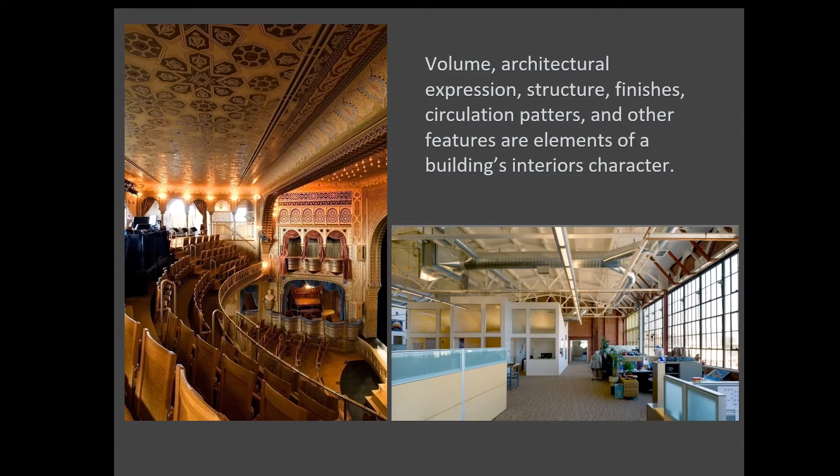Further information about identifying historic character is available in Preservation Brief 17, Architectural Character: Identifying the Visual Aspects of Historic Buildings as an Aid to Preserving Their Character, and Preservation Brief 18, Rehabilitating Interiors in Historic Buildings: Identifying and Preserving Character-Defining Elements. These publications are available on the TPS website and can also be ordered through the Government Printing Office.

The guidance in my presentation is largely taken from Preservation Brief 41, where you can find additional information on how to approach a seismic rehabilitation strategy that is in accordance with the Secretary of the Interior's Standards for Rehabilitation. To put it in a single sentence, the goal of a successful seismic rehabilitation is to reduce the seismic vulnerabilities of a building while retaining historic materials and features to the greatest extent possible, and avoiding or minimizing alterations to significant historic features and spaces.

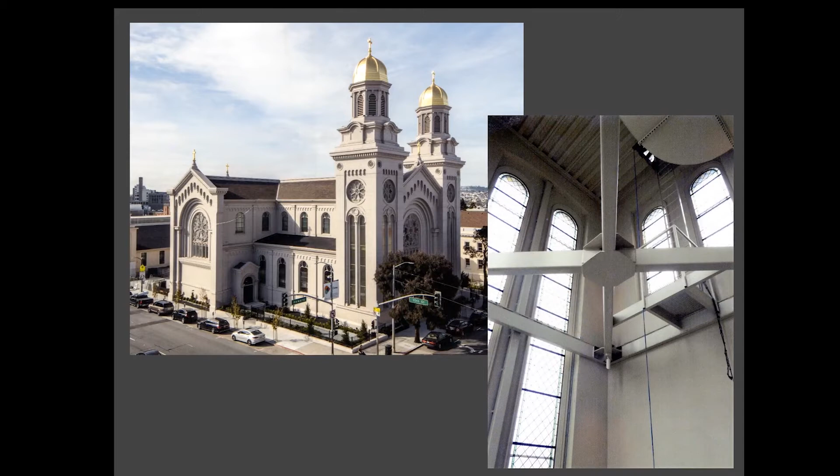The other major intervention required additional steel reinforcement within the towers. The towers, while important architectural elements of the building, are not considered primary interior spaces, and they provide a good location for additional structural reinforcement. The strategic location of these seismic interventions avoided any significant alteration to the building's character-defining interior and exterior features.

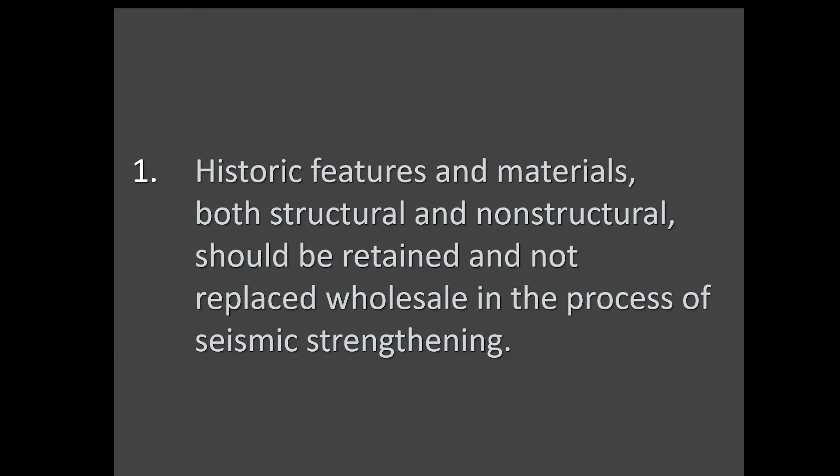Hollow clay tile is a particularly difficult building material to deal with in many historic rehabilitations, not just because of seismic concerns. Very often, complete removal of all interior hollow clay tile walls is proposed. However, in some buildings, important character-defining features and finishes are lost if the hollow clay tile is removed. When important historic features are present, the recommended approach is to reinforce the wall to preserve the historic features and finishes. When necessary, removing historic finishes on the less visible side of a wall in order to reinforce the wall and preserve the significant historic features and finishes on the more visible side is recommended.

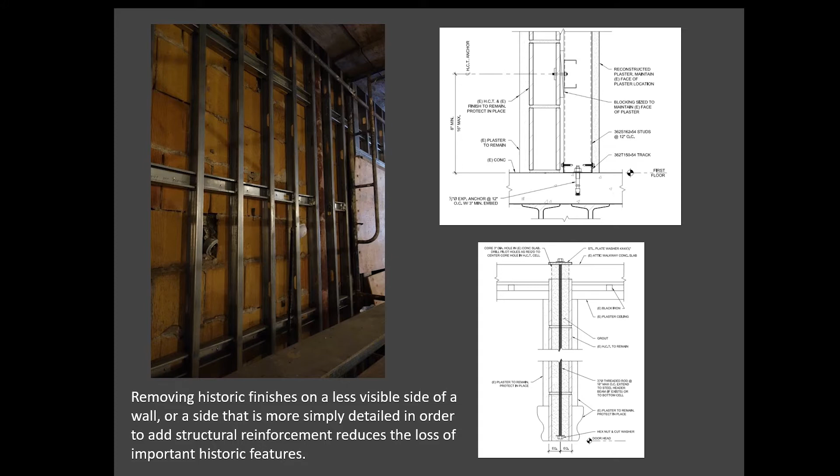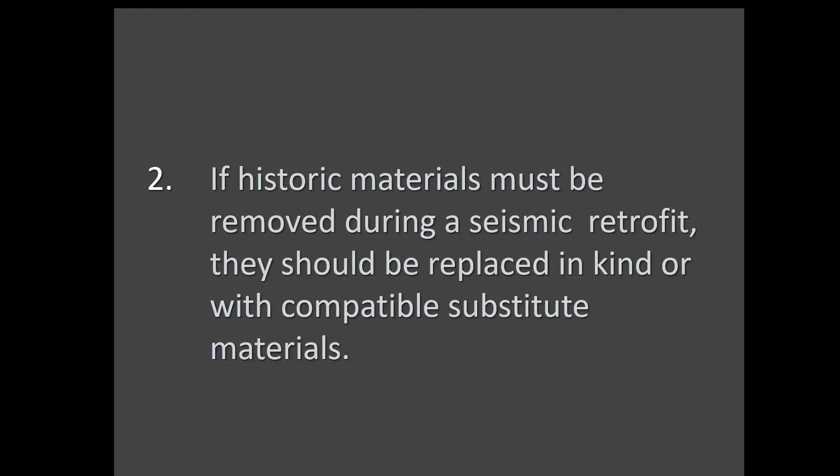The second consideration to keep in mind is that if historic materials must be removed during a seismic retrofit, they should be replaced in kind or with compatible substitute materials. In some cases, removal of historic finishes may be necessary in order to install the new structural reinforcement and avoid altering the historic character of an important interior space. In the King Street Station in Seattle, interior plaster finishes were removed in order to install steel reinforcement in the walls. Molds of the historic decorative plaster elements were made in order to reproduce and replace them after the structural work was completed.

At the end of the project, most of the historic plaster finishes along the exterior walls were removed and replaced in kind. This allowed for the new structural steel to be completely hidden and avoided altering the visual character of this important interior space.

The third important consideration to keep in mind is that new seismic retrofit systems should work in concert with the inherent strength of the historic structural system, and whether hidden or exposed, their installation should respect the historic character and integrity of the building.

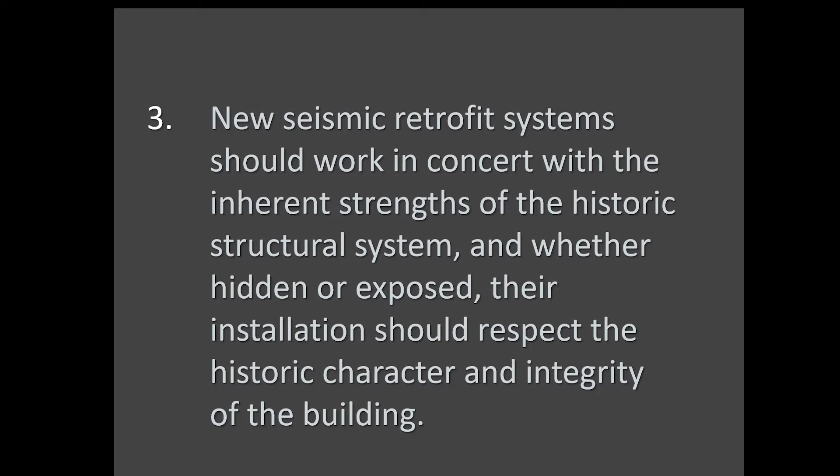In some historic buildings, hiding the new structure may not be necessary. When the new structure does not impact significant spaces or finishes, the new structure may remain exposed as long as it does not directly impact historic architectural features such as windows or doors. Locating the new structural elements some distance away from the exterior wall greatly reduces the visual impact of the new structural reinforcement.

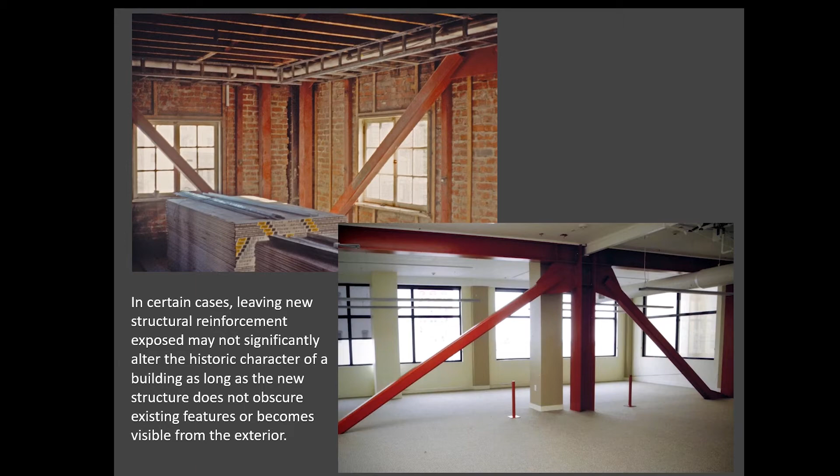The building featured here is the Hibernia Bank in San Francisco, built in 1892. It is listed on the National Register at the national level of significance and was designated as a San Francisco Historic Landmark. It is one of the finest examples of its kind in San Francisco and one of the few structures to survive the 1906 earthquake.

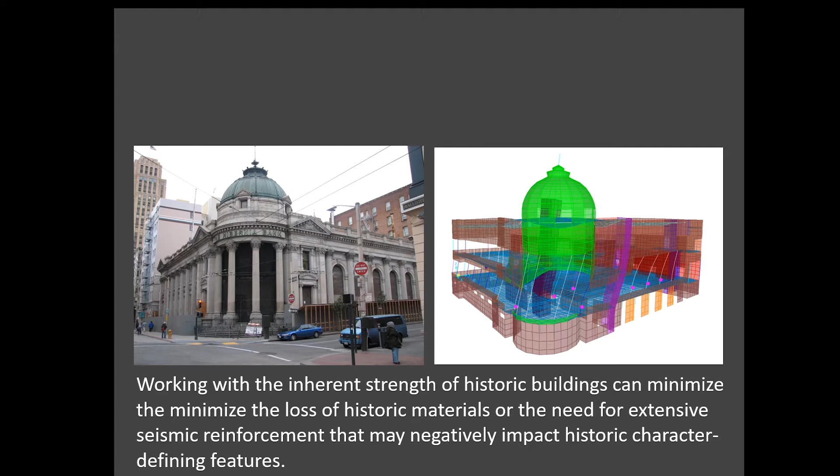The building's large, open spaces on the ground floor are lavishly decorated and are important in defining the building's historic and architectural significance. Preserving the historic visual character of these important character-defining spaces and finishes was of utmost importance in planning the seismic reinforcement on this project, which was certified under the federal tax incentives program.

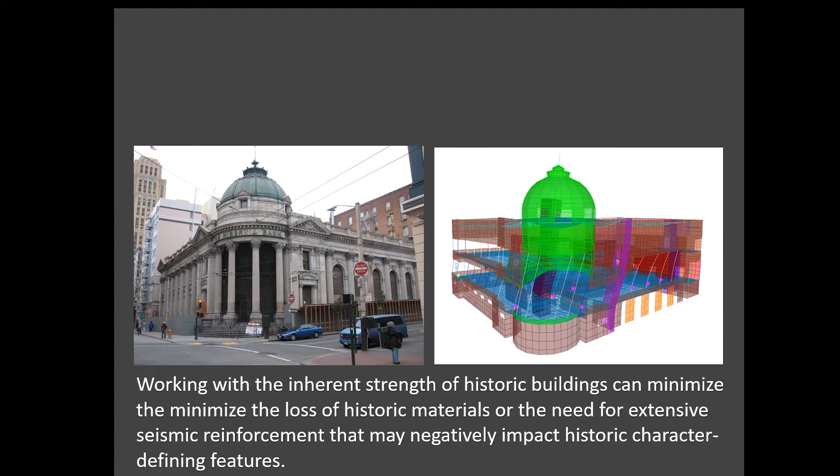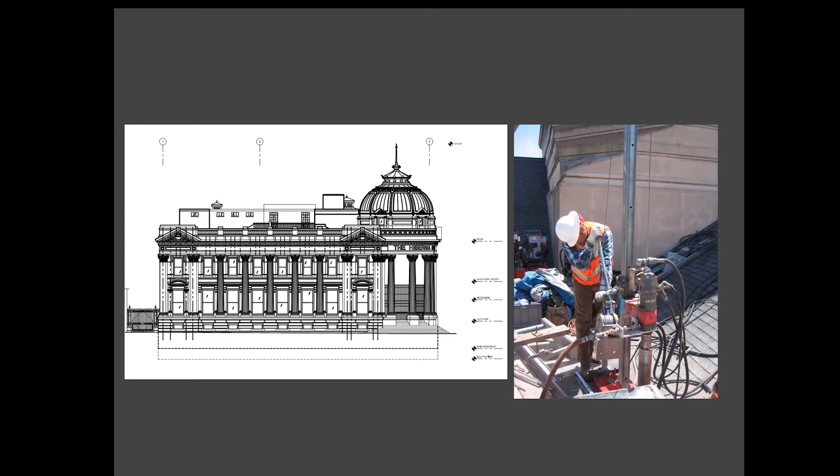The methods used to reinforce the exterior facade of the building involved core drilling to add steel reinforcement in some of the columns. Bond beams were added to reinforce the roof. The two large openings on the roof were identified as problematic and needed to be addressed.

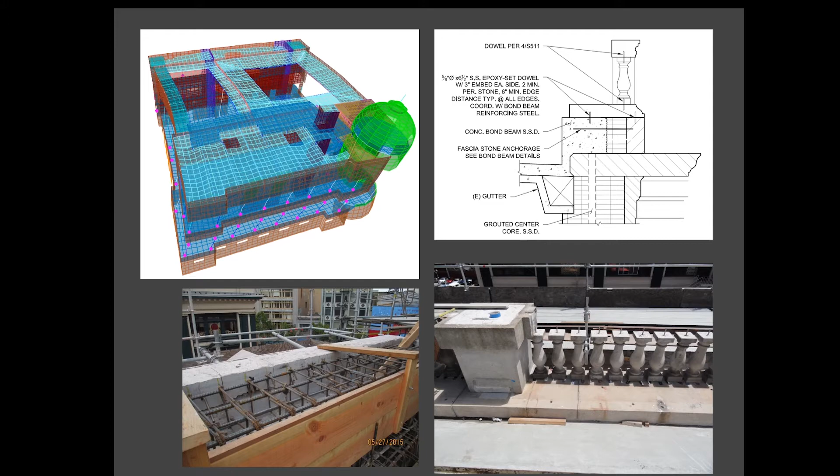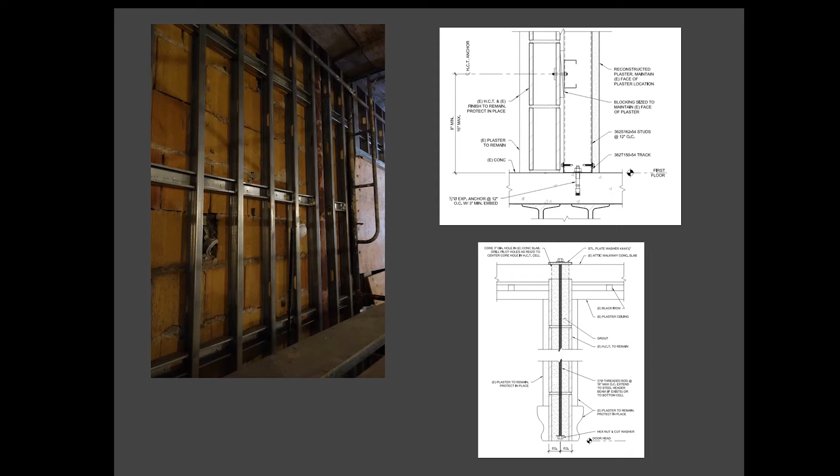The location and placement of the bond beams was carefully designed in order to avoid significant alterations to the building's appearance. After the beams were placed, historic finishes and decorative elements such as the balustrade were reinstalled. To reinforce the hollow clay tile walls and other masonry walls on the interior, metal stud walls were introduced. When thickening the walls was not possible, fiberglass reinforcement was added.

In the end, the careful planning of the seismic rehabilitation allowed the new reinforcement to be virtually invisible. As a result, the building's exterior remained unaltered, as well as the banking hall and other character-defining interior spaces.

To conclude, I would like to stress the importance of doing a thorough evaluation and investigation of a building before planning a seismic rehabilitation. The value of putting together an experienced team cannot be underestimated. Every building is unique and requires an approach that is tailored to its physical attributes and historic character.

I would also like to encourage early consultation with the State Historic Preservation Office staff. They are a great resource and can provide valuable guidance when planning a seismic retrofit program. And finally, when applying for tax credits, an applicant may request that the State Historic Preservation Office ask the National Park Service staff for a preliminary consultation to evaluate the viability of a particular seismic strategy.

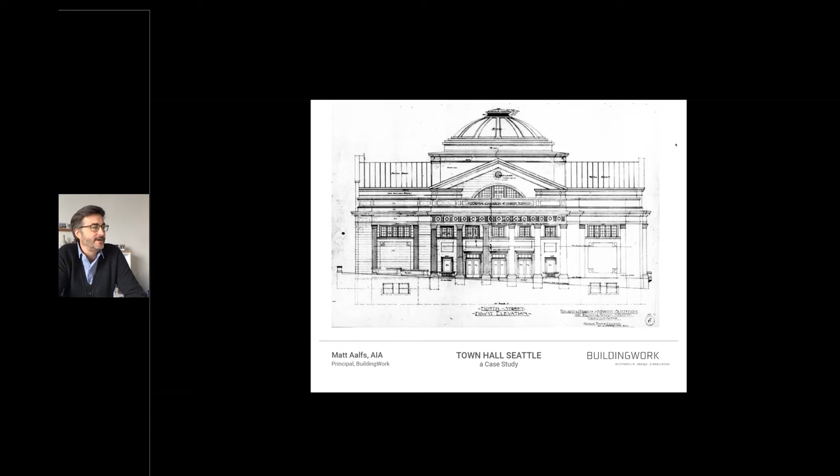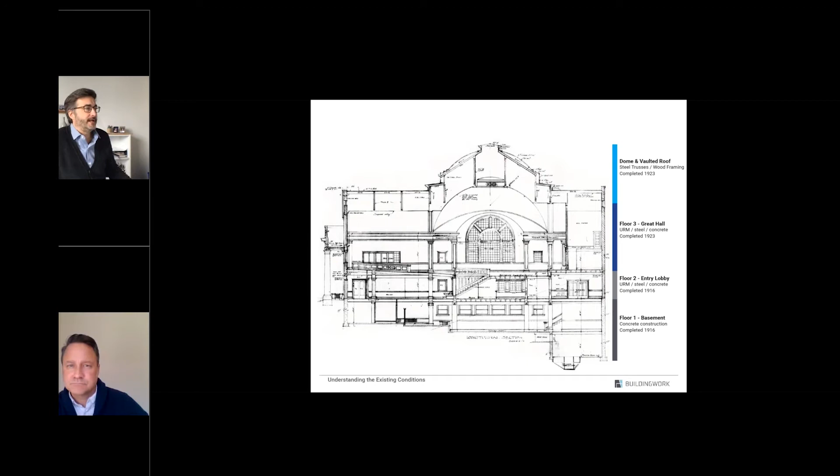Further complicating it is a long span roof system. The building has a vaulted roof, a cruciform vaulted roof that intersects a large center. So a really significant assembly space, significant life safety risk in a seismic event. And the building had suffered very significant damage from previous earthquakes, the 1949 earthquake and the Nisqually earthquake in 2001.

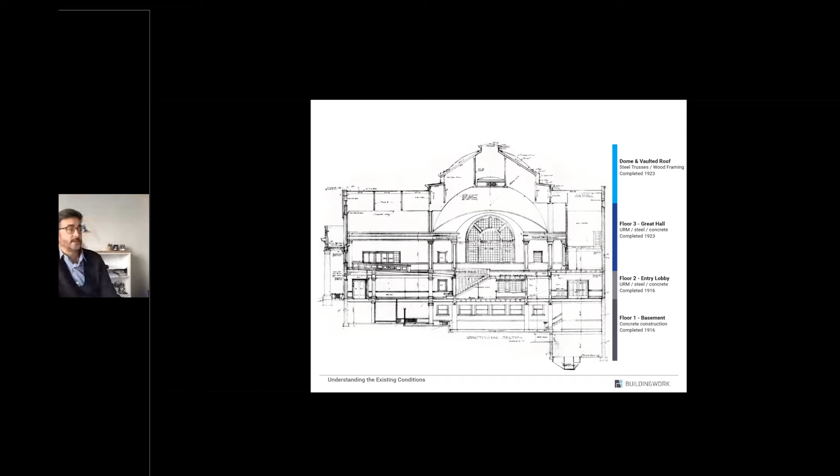Our design challenge was to convert this church, which was in its really original condition for the most part, into a state-of-the-art performing arts center. And by that, we mean patron services such as restrooms, accessibility, elevators, entirely new HVAC systems, entirely new acoustic systems, lighting systems, in a building that was never designed to have them.

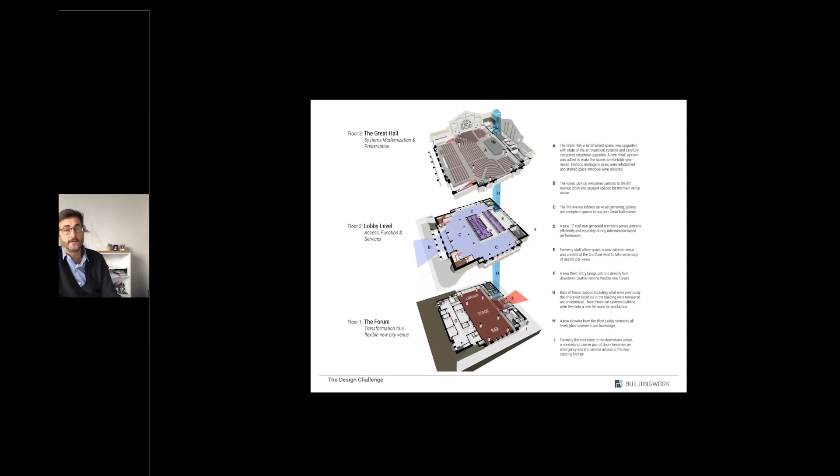And then, of course, the biggest aspect of this was the seismic retrofit, because when you're doing this much renovation on a building, you are required to bring it up to code in general. So the seismic retrofit became an early focus of the design. This diagram just shows the different program elements of the building after it's completed.

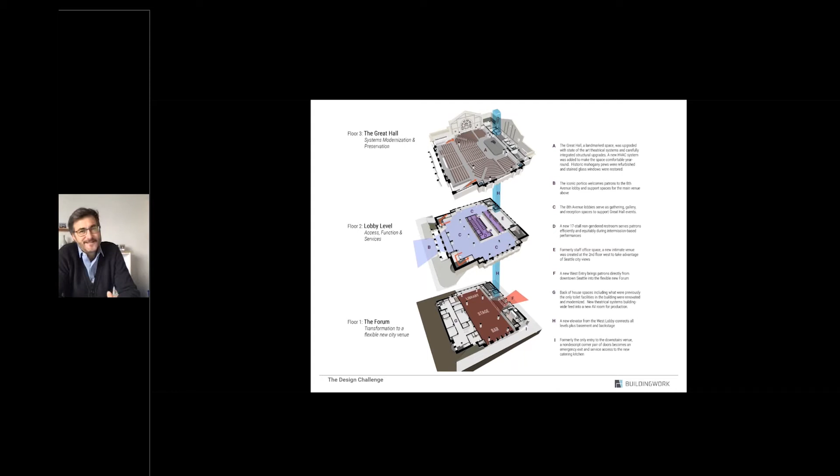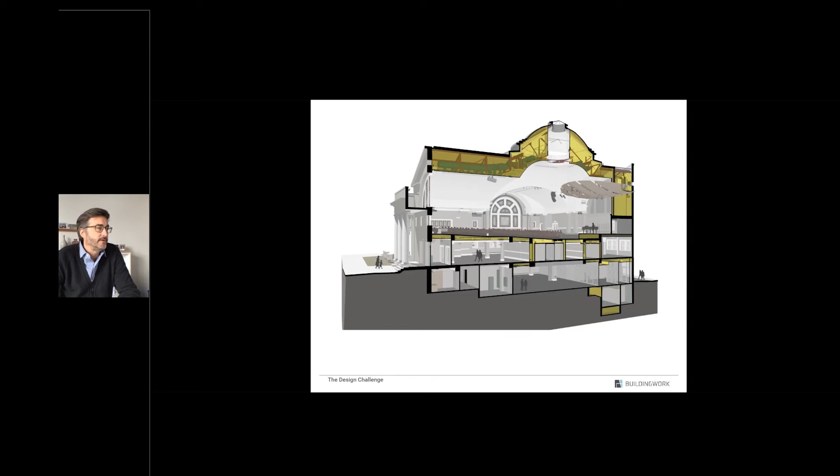The next drawing shows the design challenge is that we had very little space to put new elements, new structural elements or anything else. In addition to the exterior of the building having very significant historic value, the interior, the Great Hall and the lobby spaces on the main level, are all of high historic significance, and all of which needed a very sensitive approach to renovation or to the seismic retrofit. Again, working with very limited spaces for new plumbing, for piping, for new steel systems, et cetera.

So approaching the seismic retrofit design, we have a great structural engineer, Magnusson Klemencic Associates, which is a national firm based here in Seattle. And the starting point for many seismic retrofits that you might see is introducing new braced frames or shear walls. The buildings built in this era do not have structural elements that are specifically designed to resist sideways motion or lateral forces. So we have to put those into the building. As Antoni mentioned, it's a significant challenge.

This would be the sort of off-the-shelf approach on this image right here. Steel braced frames inserted in the center of the major walls, which have vulnerability, in this case, because of very large windows. We have double height walls with very large stained glass windows. Obviously, this was not an approach that we wanted to pursue, and it was not an approach that met the goals of working on a historic building like this. But I mention this because this is where you start when you're talking about engineering a building. And you would see this approach very often used in warehouse buildings or other URM buildings, the big braced frame in the center of the wall.

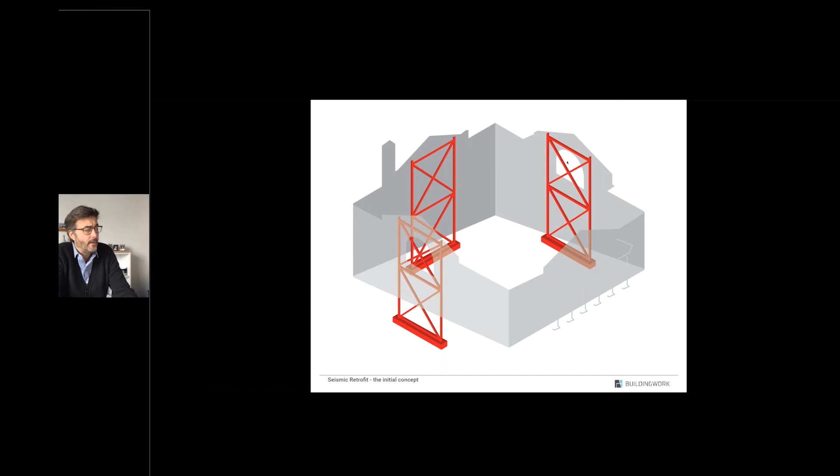We went back and we looked at the building, and what we realized is that the building has stairwells in each of the four corners, which is great for exiting. But the finish in these stairwells was not nearly as highly finished or decorated as the finish in the main spaces. These two stairwells back here are really back of house spaces. And these two stairwells were significant, but the wall surfaces were pretty straightforward.

So our structural engineer and I came up with an approach of putting in new concrete shear walls in the corners of the building and then tying them together with steel plates. In this case, we used epoxy to secure the steel plates to the concrete slabs and connect them to new concrete shear walls in the corners of the building.

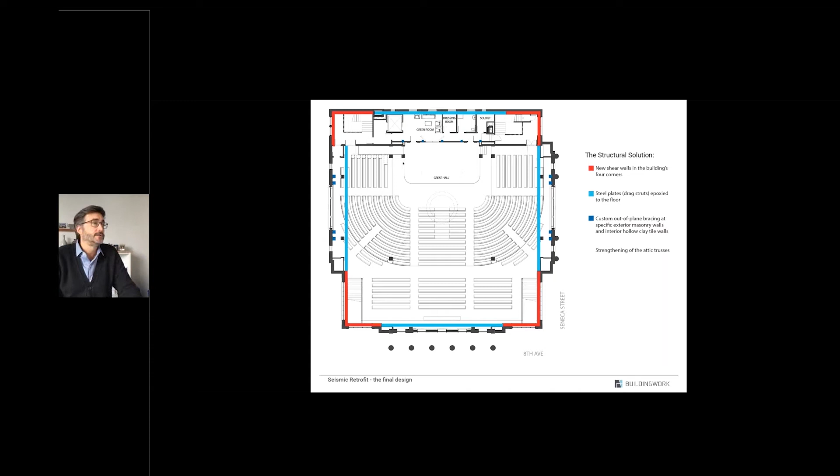There was also a need then to address these URM walls, the ones that have the big stained glass windows, and their out-of-plane movement. So once we addressed the stabilization, the building was no longer going to move side to side, but the big walls could still fall out. So that's where we had to put new structural steel that would be visible.

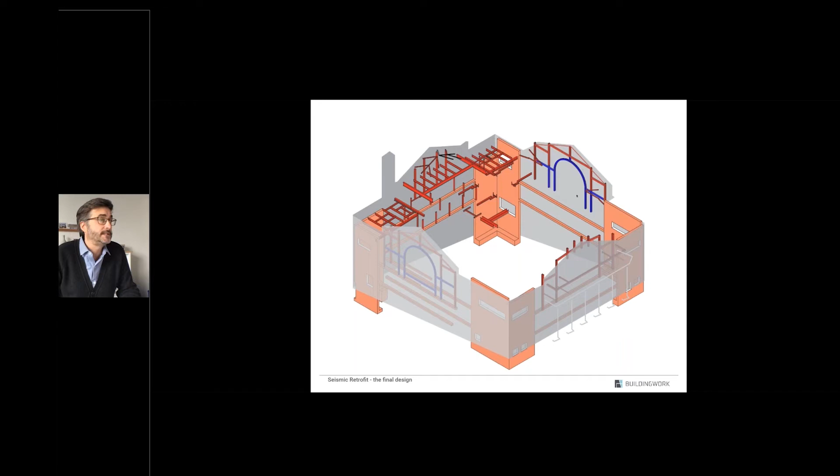Here's a diagram of the final structural design. You're seeing in this light orange color the concrete shear walls in the corners of the building. These are 3-story high, 10 to 11-inch thick concrete shear walls. In red is all new structural steel, which is concealed behind finishes or above ceilings. And then in blue are the only elements that are visible, which are the out-of-plane steel on these large, vulnerable walls.

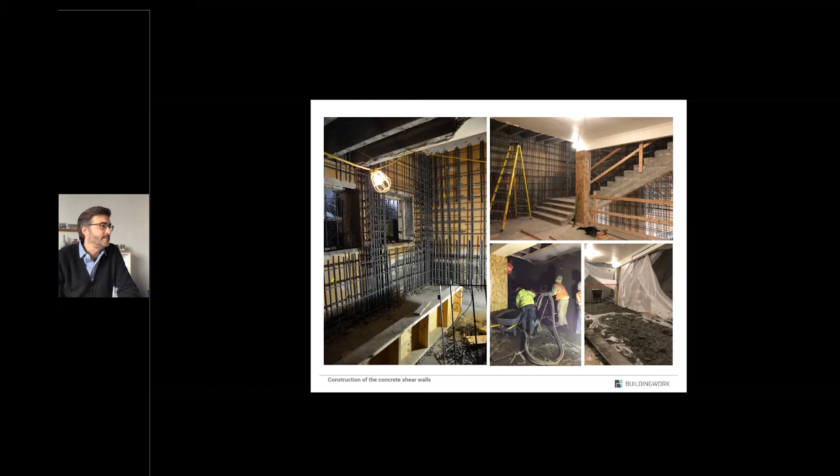Here's some photos of the construction of these concrete shear walls. It's really difficult to do inside a building, but our general contractor, Raffin Construction, did a great job helping to figure out how to build this and to get it done. But it was really, really challenging. A tremendous amount of rebar had to be put inside, and then hand pouring the concrete into that space for these four 3-story tall shear walls in the corners.

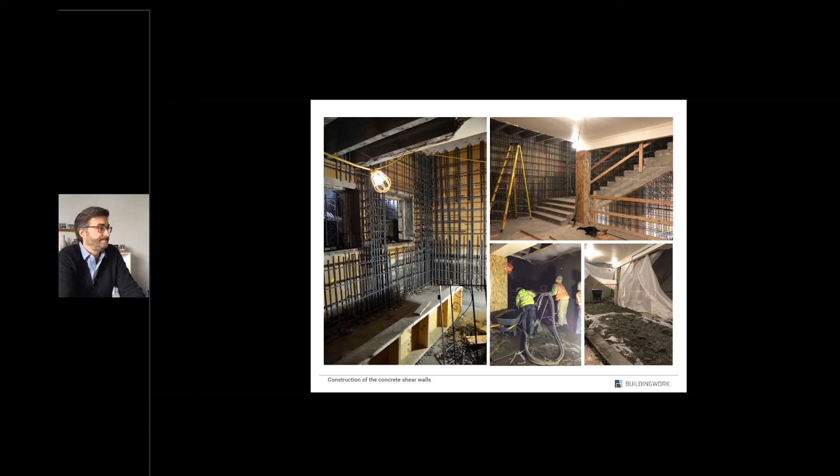I'm about out of time, so I'm going to wrap it up here.

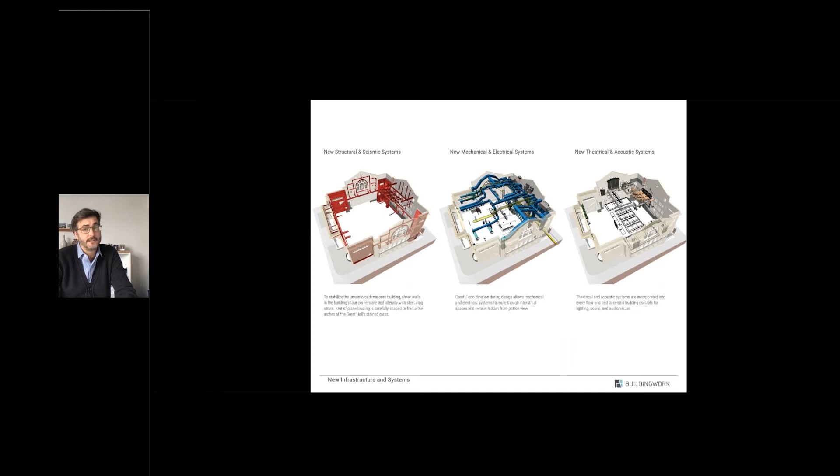Sympathetic to the architecture, and then again allowed it to be exposed. Finally, a couple more slides here. These images show the tremendous amount of infrastructure that had to be inserted into this building. On the left, these are all the structural systems. In the center, the new HVAC, mechanical and electrical and plumbing systems that went into the building. And then on the right, all the new theatrical and acoustics systems. Much of all this work was concealed.

So to summarize our approach to the seismic retrofit of historic buildings, a few key strategies or ideas that I think are really important for any building. One, study the building and learn how it was built, what makes it unique. I think what you find when you're dealing with buildings of this age is that they're all different, and there isn't clear documentation. You really have to become sort of a forensic investigator, or you and your team do, to understand how it was built.

Look for observed damage and look at wear patterns to understand weaknesses in the building. That can be done visually by architects and structural engineers. I think it's a part of getting to know the building. The project is going to require really extensive collaboration between architect, structural engineer, and other specialists. And the owner and the design team need to be aware of that. We really need time and a great deal of effort to understand and collaborate on solutions.

And then there are no standard solutions. I think that sometimes there's a desire to find a quick fix, but really the right approach, if we're going to work with Secretary of Interior standards, is to be flexible and find solutions that you may not have thought of before. Of course, we have to determine the character-defining features that need to be lightly touched. And then we think it's valuable to try and create a visual dialogue between historic and new elements so that you can see and understand that difference.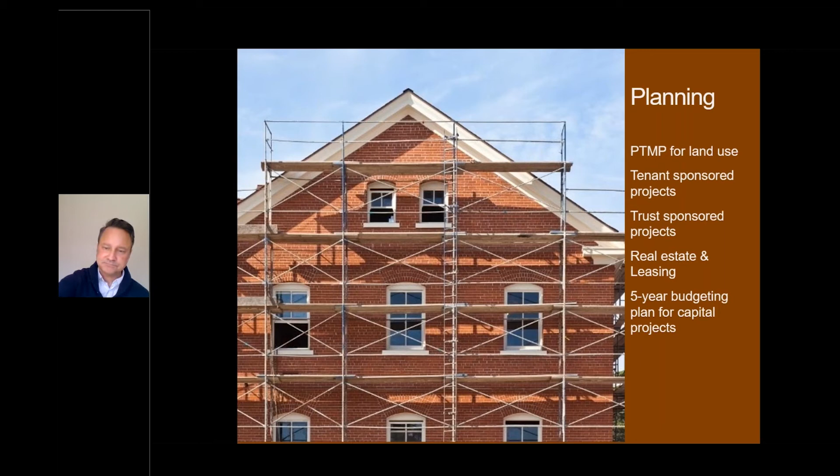Once the rehab gets underway, we put a couple of tools that we have at our disposal into play, including an in-house Section 106 review process that's guided by a programmatic agreement we have with the Park Service and the California SHPO's office, which has been very successful and very helpful over the years.

We also have our own in-house code official and permitting office that helps set standards and code considerations for our projects. As I mentioned, we have design professionals on staff, architects. We don't have an engineering team, so we do contract with outside A&E teams to bring them in to do the work, but we have professionals here on staff to guide those teams. Preservation Brief 41 is, of course, a guiding principle to all the work that we do around seismic retrofits.

And then as far as code guidance, we use the International Building Code along with the International Residential Code and existing building code, along with FEMA guidance, including the National Earthquake Hazards Reduction Program recommended seismic provisions for new buildings and other structures. And then we have been in the process of incorporating the executive order from 2016 that established a federal earthquake risk management standard. So all of this goes into the pot when we're considering how to approach a particular seismic project.

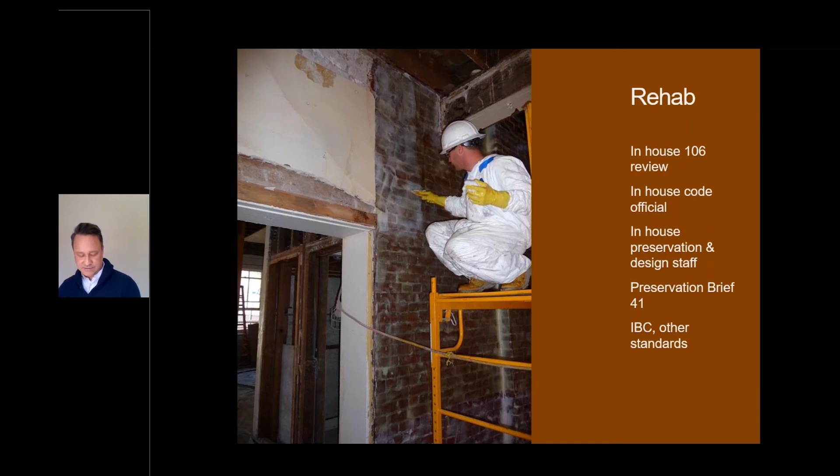But in general, our upgrades are designed to provide life safety for building occupants in the event of a major seismic event, but they are not necessarily designed to prevent full building loss. So other factors that we consider when planning and designing projects are, and a lot of this came up in my predecessor's presentations, the integrity of the resource is a big consideration. We work with both interior integrity as well as exterior integrity for our buildings, but there's a big variety in what the Army left behind that we take into consideration.

The specified program and building user is a big factor, of course, whether a building is meant to house a museum collection versus an office use. Site-specific considerations: even though we're working in a very local environment, a lot of different factors come into play, everything from geotechnical differences and variations to differences in the actual composition of mortar used in otherwise identical seeming buildings. The approach and strategies of different A&E teams also very much comes into play. Different structural engineers in particular have different approaches to how they will do a project. And then, of course, the particular client and the budget they bring informs how things go forward.

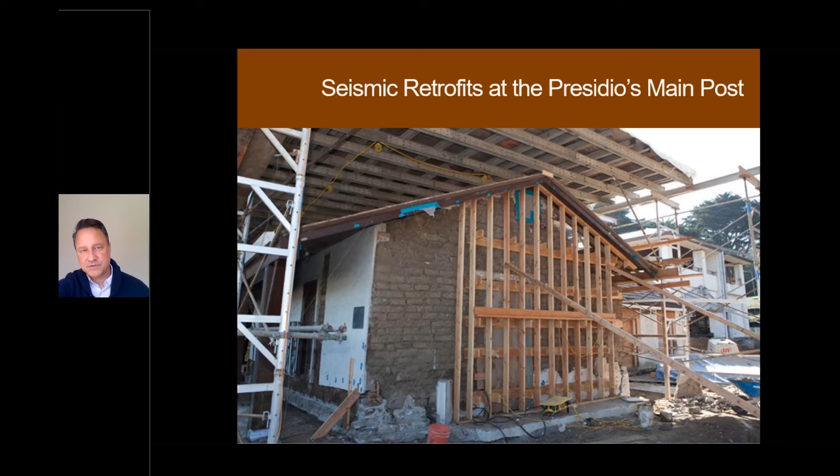So real quickly, within my last minute here, I just want to show you a couple of quick examples of seismic retrofits here in the main post, beginning with a tax credit project. Antonio was involved in this. This is a 1909 band barracks that was rehabilitated in 2010 using a shotcrete perimeter wall solution for the basement and 2 upper floors of this masonry building.

Right next door, an almost identical building constructed in 1895 used a very different approach, in this case FRP, or fiber reinforced polymer, and this was used in this case due to a high level of interior integrity that this building had that we really wanted to retain and had the opportunity to retain with that particular seismic strategy.

Again, just moving down a row of buildings here, this one is not fully rehabilitated, but has been stabilized in recent years using limited brace frames. But at some point, this will get a full seismic rehabilitation prior to occupancy. And then its neighbor used shotcrete perimeter walls and a pretty major interior intervention due to the fact that it's housing a museum collection, in this case, the Walt Disney Family Museum.

Just down the road, and these are my last 2 examples, is a 1903 bachelor officers' quarters that was rehabilitated in 2012 as a hotel. And this used a shotcrete basement approach with center core at the porch piers that you see, the 4 porch piers you see on the front.

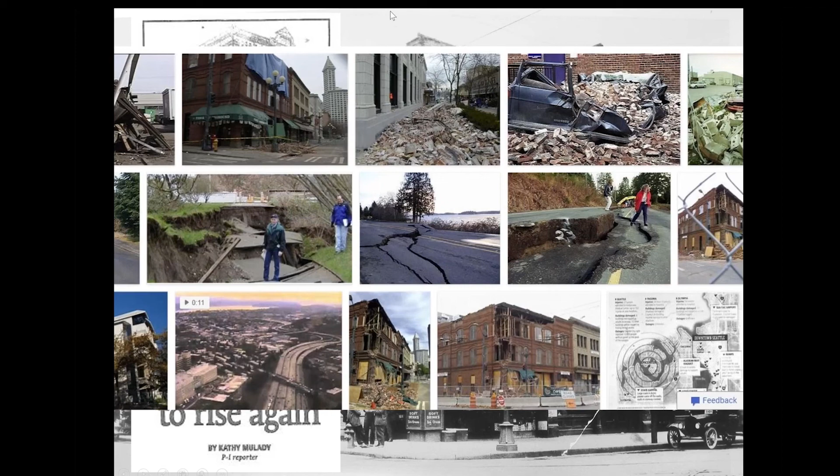So it was severely damaged during that earthquake, and while this looks a little distressing, it also gives us some wonderful cross sections of how the building was built, and you can see the brick cross sections through the windows. The building sat unoccupied for almost 2 years as the sale of the building to Historic Seattle continued, and then the rehabilitation didn't happen until about 3 years after the earthquake happened.

The building is located at the corner of 2nd Avenue and Jackson Street in Pioneer Square. It is backed up to the adjacent Duncan building to the north. This is a ground level plan, and you can see we've inserted 3 different brace frames into the plan. The key to understanding where these brace frames got located is to know that a lot of the building was designed as core and shell.

So at the time, the Klondike Gold Rush National Historical Park had not signed any leases. No offices had signed any leases. So we were basically doing the core and shell, which meant everything on the exterior was easier to insert a new structural system than it was in the interior. We could have put one along the adjacent property line, which would have made sense, but we also needed that wall to put a lot of the core elements like new toilet rooms, stairs, and egress. So this is the first floor.

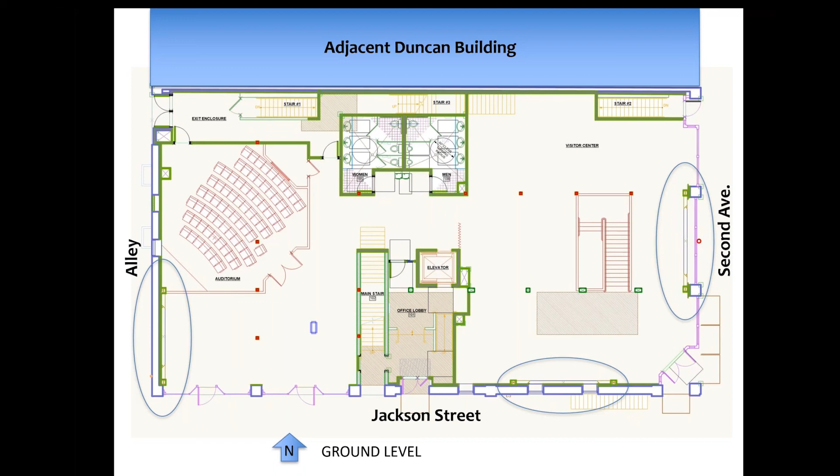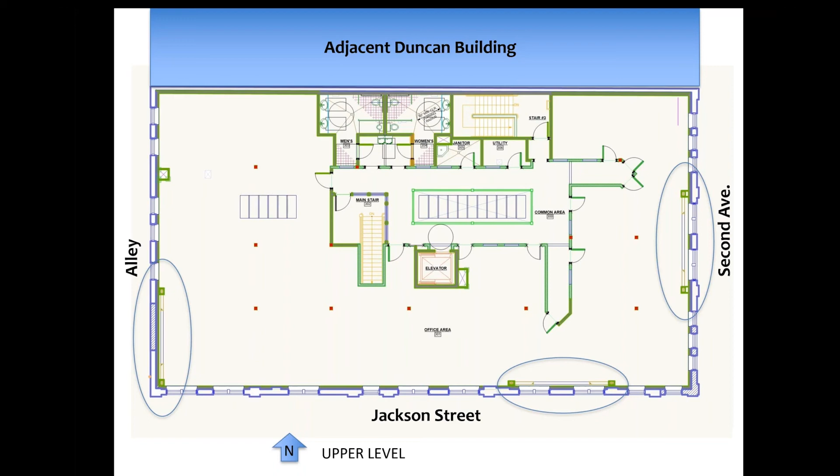On the second floor, they come up again. We had mainly core and shell type office spaces. And then the portion we were trying to avoid, which is the atrium in the middle and the stair that came up from the first floor. These were the two major historic intact features of the building. And in this building section, you can see them.

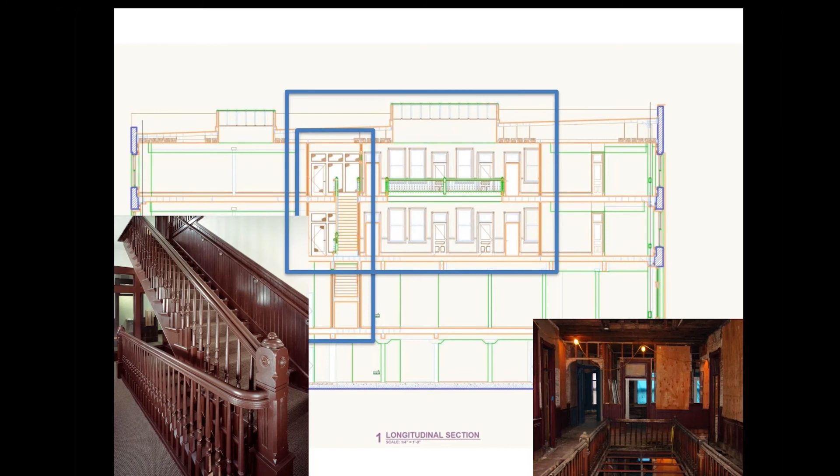And this is a picture of the stair in a before condition. This is a picture of it after. The atrium, which had most of its historic trim, but almost none of its plaster left. Here's a picture of it after the renovation.

These were the two primary spaces we really wanted to protect, and so it made it easier to push the brace frames to the exterior, which a structural engineer will tell you is where they want them, at the exterior of the building. At the elevations, you can see the one at the alley was pretty well disguised and can't be seen from the exterior. On Jackson, we located it in the bay that at least had the two smaller windows at the first floor, making them a little less distinguishable from the exterior.

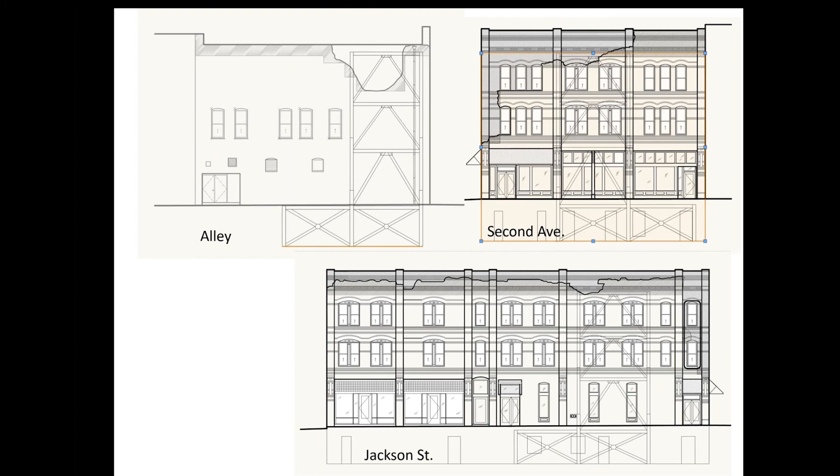The Second Avenue one, though, was more difficult. We had complete storefront across the first floor, and so that one became a little bit more prominent in that elevation. But in the end, it was the interior spaces that were important, so we needed to keep it there.

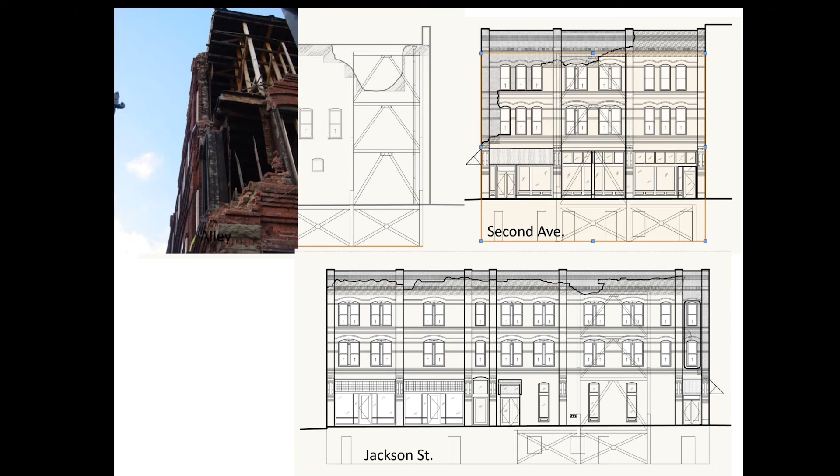It's hard to talk about the Cadillac without talking about the masonry restoration. This is the picture from earlier of its lost corner, which is this section here. All of the grayed out brick was either gone or had fallen, or we had to remove it in order to get back to sound masonry. But we were able to rebuild it. Most of the original brick, after it had fallen, was damaged. So we had to find some solutions to use less brick.

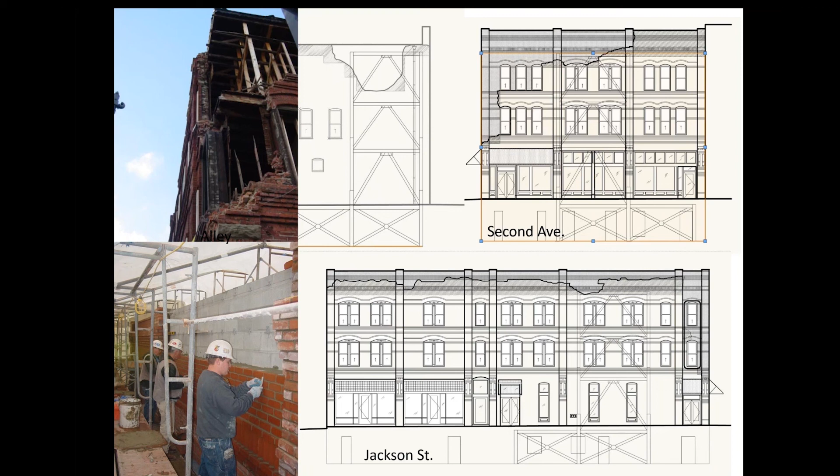Behind the veneer of the upper stories is a concrete block, which also helped in the seismic retrofit because we were able to reinforce that. So the parapets above are even stronger. We also had to locate some new brick, which we did not have a problem finding color-wise, but all the existing brick in the building had a very unusual size, both height and depth, and we ended up having to use paver brick because none of the actual veneer brick matched any of the sizes on the building. So there is the rebuilt corner.

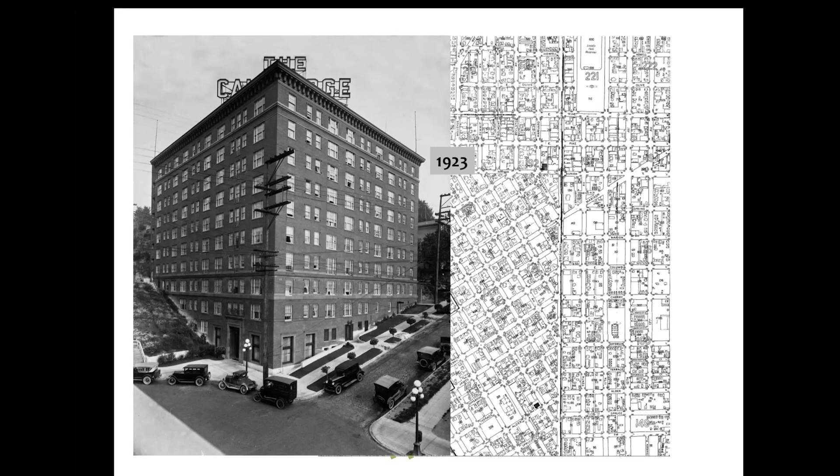The second project is the Cambridge Hotel. It was the Cambridge Apartment Hotel, I'll explain in a minute. It's only a few blocks from Town Hall, which I believe is over here. The green is where I-5 went in, so it barely missed destruction from I-5 and the convention center. It was built in 1923. It is a 10-story building. It is on the National Register of Historic Places.

And one of the important aspects of this project was we did have 40 tenants living in the building while we did the construction. There's 150 apartments, but 40 tenants decided to remain, so we were doing this building occupied. Now this is not a URM, but it's a concrete building, cast-in-place concrete, as you can see from this cover of a 1922 Pacific Builder and Engineer magazine.

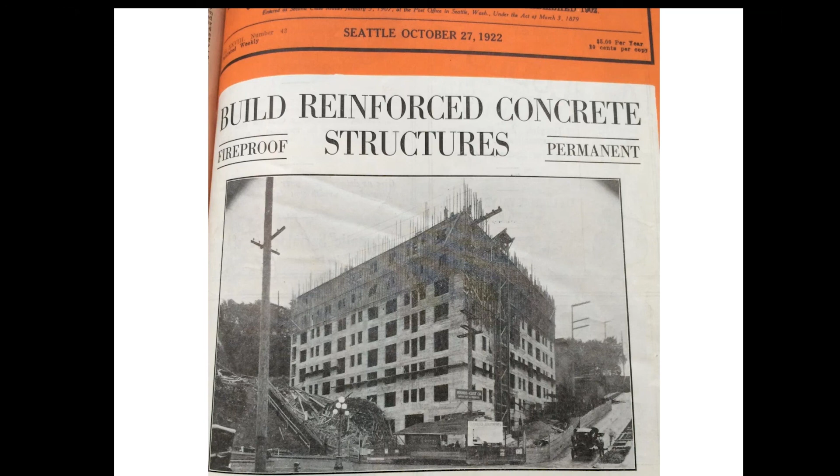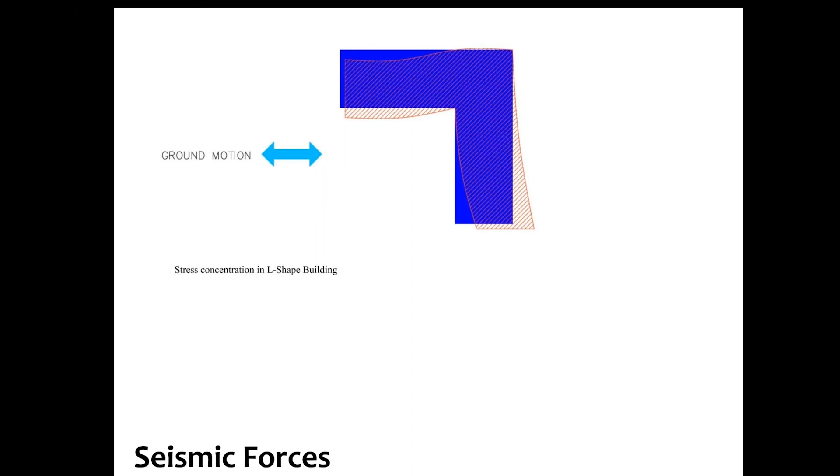And it's an L-shaped building, which, while it's a common thing for apartment buildings in order to get light courts in the middle, is considered an irregular shape by structural engineers, because when the ground motion happens, both of the wings want to react in a different way, which is what this diagram is showing. And you put that into a plan for the Cambridge, that kind of action wants to make a building like this crack right down the middle of the corner.

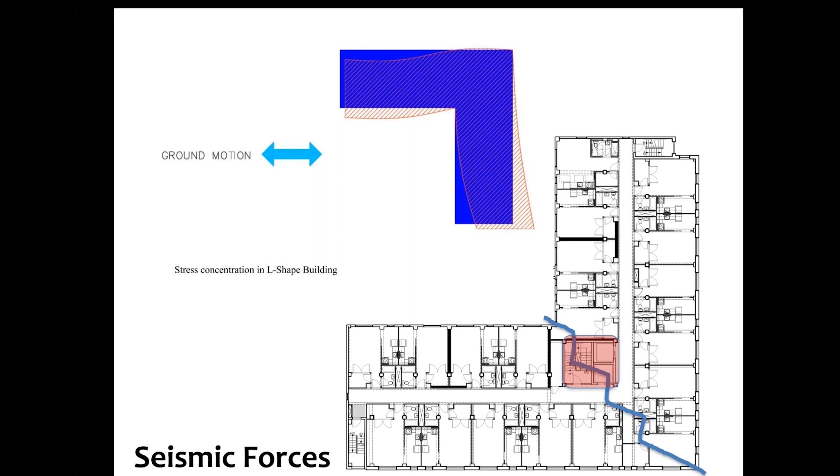This is made even worse by the fact that the typical place to put elevators and stairs, which is right in the middle of the building, is weakening that corner even more by putting a hole all the way down the slabs of all the stories.

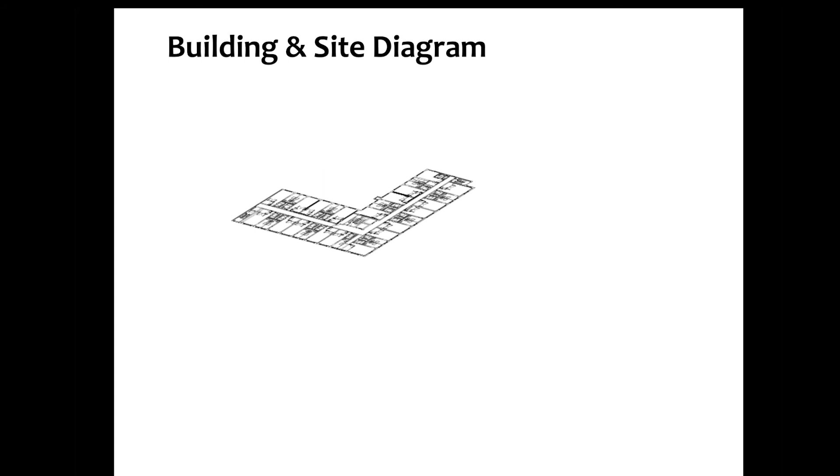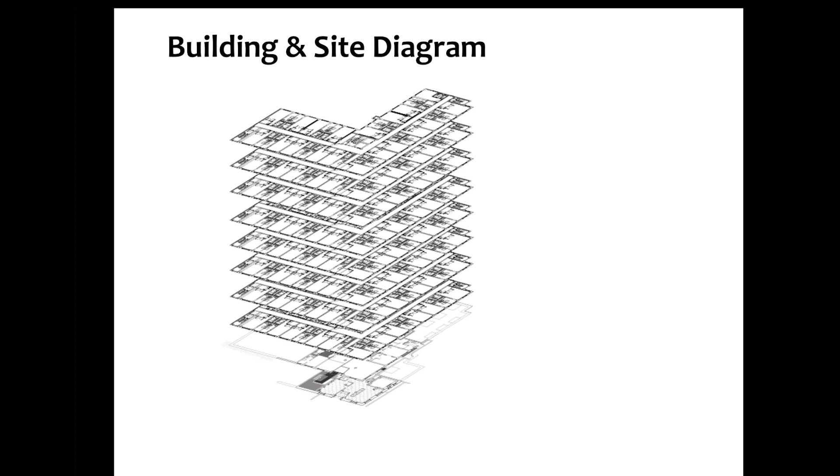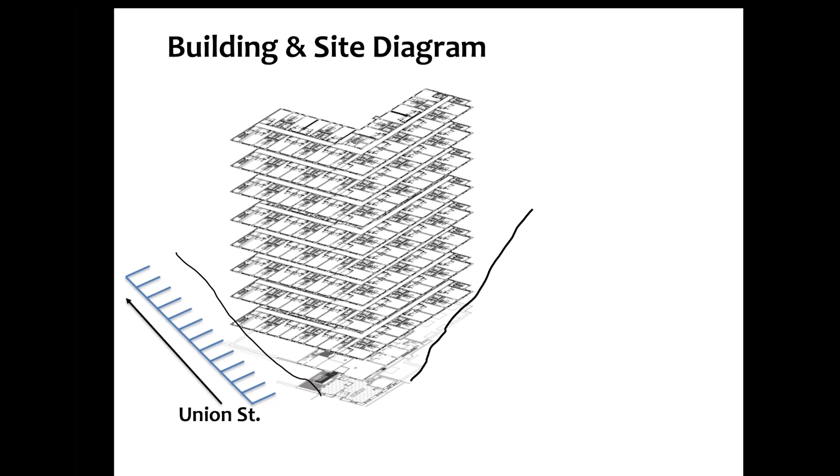So to understand this building a little better, it's nice to have this diagram, which here's the L shape of the building with the apartments. We have eight stories of that. But then at the bottom, we have two very small floors. The reason for that is this building is nestled nicely into a hillside, First Hill, with Union Street being an actual staircase, and the main entry being right down there at the bottom. So it has a very small footprint at the actual bottom.

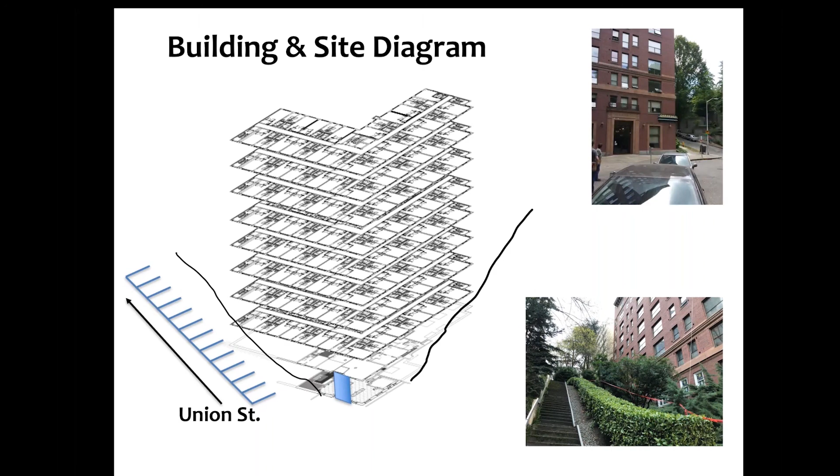And the result of that was then, besides a lobby, they also had some kind of food service type room, which this one had a tea room that was still intact, but being used as a manager's unit at the time, and a radio room that was nestled right below the tea room off the lobby. The radio room was kind of the equivalent of an apartment building providing free Wi-Fi at the time.

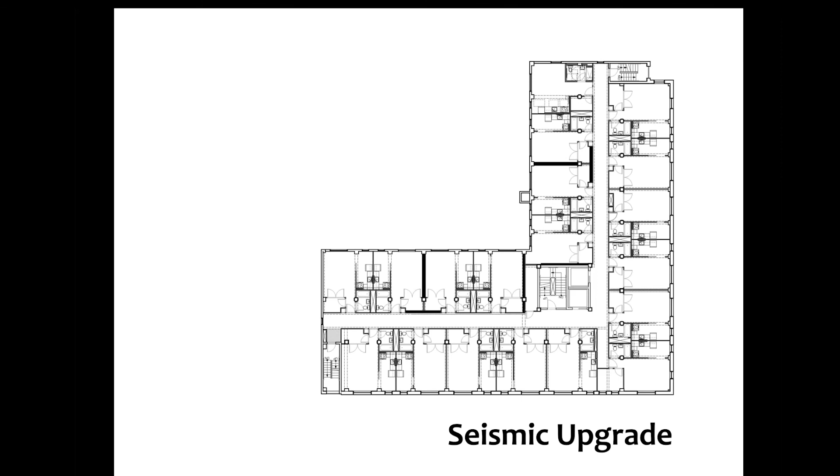So in order to come up with the seismic solution here, we went with concrete shear walls because we could get less of them in than we would have with steel. But we needed to avoid the lobby at the base. We needed to avoid the tea room and the radio room, which were right below. We also needed to avoid the corridors for two reasons. They were a very intact space historically, but they also needed to remain as egress throughout the project because we had 40 people still living in the building.

So the concrete shear walls then went more interior of the building instead of pushing it to the exterior. The best place for any kind of retrofit would have been on the exterior corner, basically right where the lobby was located. So instead, we went with these concrete shear walls in the interior of it.

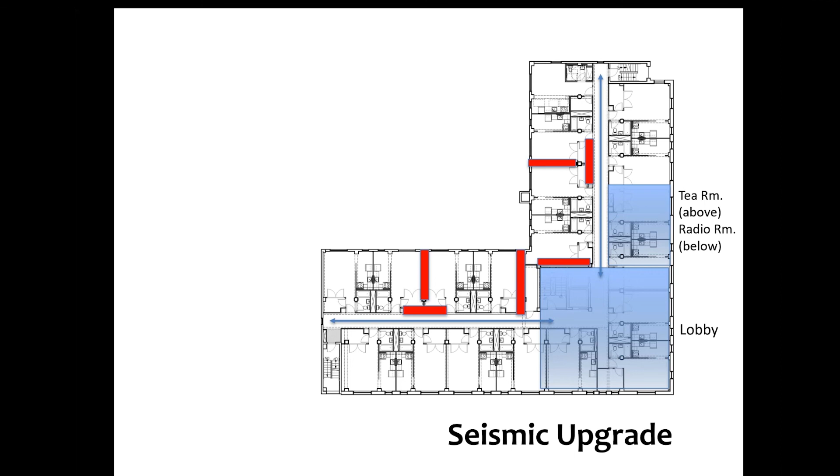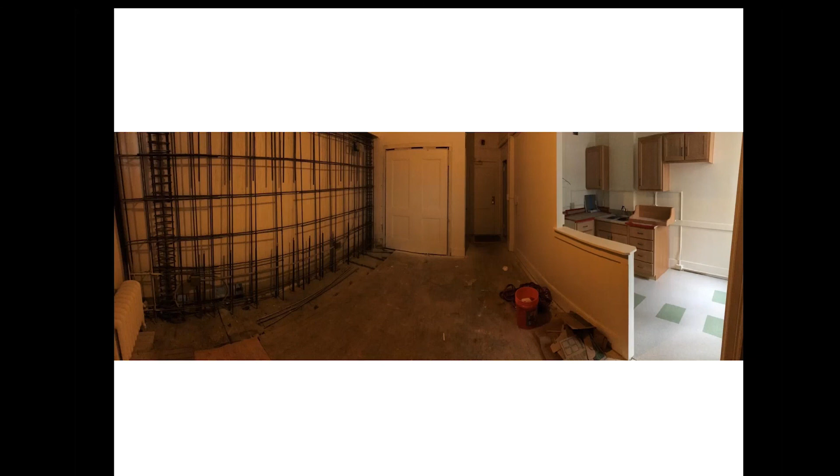To wrap up, I just have a few extra photos just to show some of the other aspects of these projects. As I said, the Cambridge was an occupied building. So between that and the concrete shear walls, it made for a very unusual construction schedule. So a lot of the times they were still building concrete walls in completely renovated units. And on the right of this photo, you can see the kitchen is almost complete, but the concrete shear wall has not.

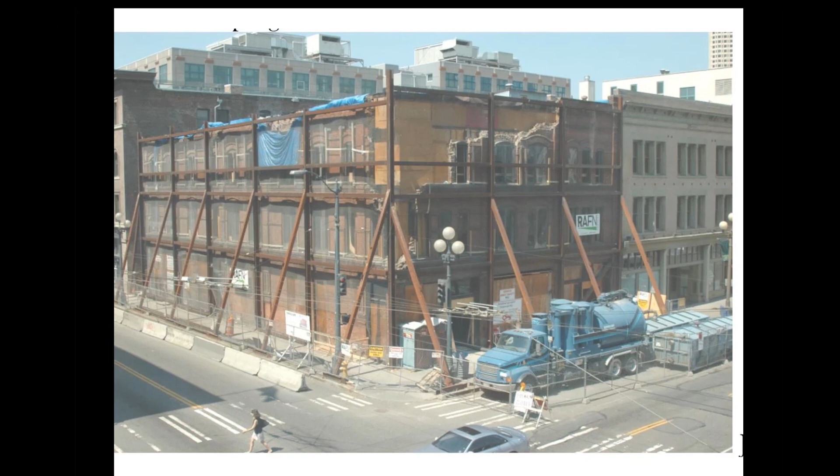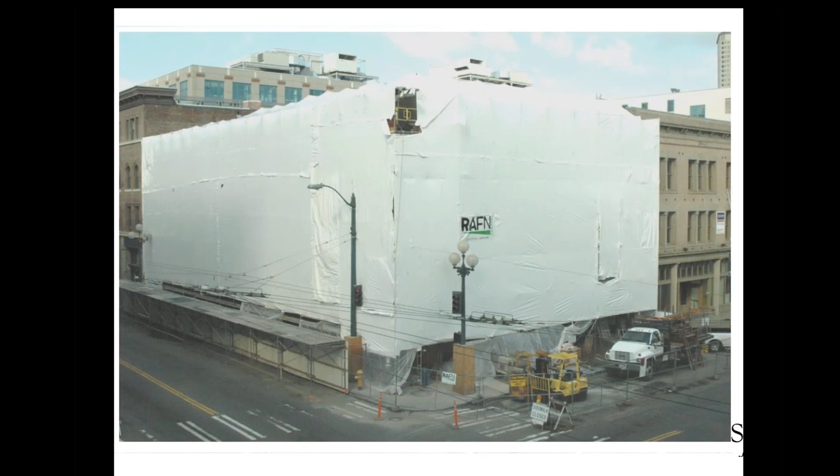And then this series of photos for the Cadillac. It sat this way for almost 2 years in a containment frame to protect any additional falling masonry. As construction started, the frame slowly came down and the scaffolding went up. And then it entered its marshmallow phase. And when that came down, you have the restored building.